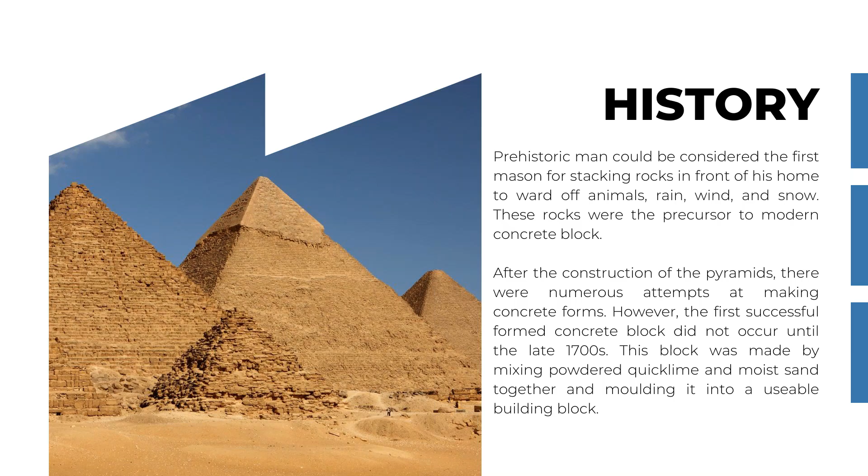In the late 19th or early 20th century, the industry started - we can say that because in 1904, Mr. Herman and Jesse Besser patented the first hand-tamp concrete block machine, which produced one block at a time. This idea caught on and the use of blocks grew.

In today's time, you can see the block industry where people have different levels of automation machines used for manufacturing concrete blocks. Over the last 100 years, the uses of concrete blocks have greatly expanded along with the technology to produce them.

If we look at the time period from the late 1700s to 1900, we can presume a lot of development took place to arrive at mechanized production. Going from manual production using available resources to converting it into mechanized production with a hand-tamp concrete block machine was a long journey - that made the beginning of the industry.

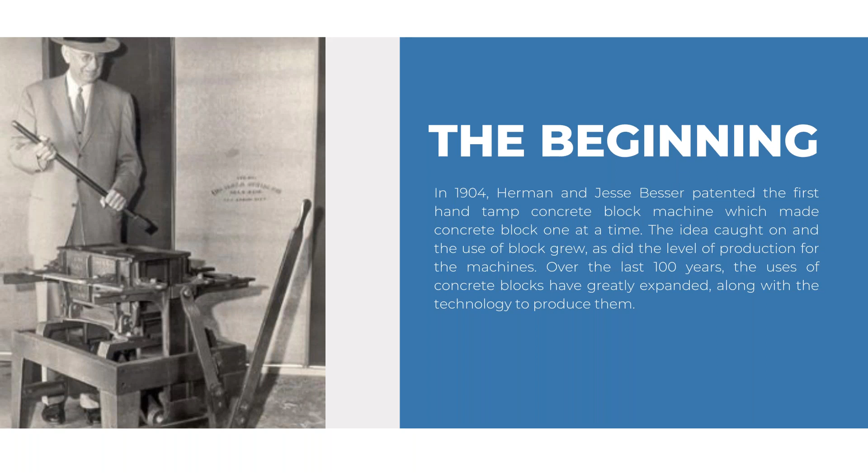With the hand-tamp machine started by Mr. Besser, the industry started. But initially, the blocks people produced were only solid blocks, because people always went for a solid component, since the block was a replacement or elevated form of brick. Brick had been available for a long time, but people wanted a better product that could be of more use to the end user. So with blocks, the first product that came into existence was the solid block.

Now we have different types of concrete blocks: solid blocks, which are widely used, hollow blocks, AAC blocks, and thermal insulated blocks. I won't throw much light on AAC blocks since we had one session on that already - thanks to Mukund Joshi sir for sharing his experience and knowledge on AAC blocks. So there are solid blocks, hollow blocks, and thermal insulated blocks.

What is a solid block? A solid block is basically a block made with standard dimensions. Today we produce standard dimensions with thicknesses of 200mm, 150mm, and 100mm, normally called 8-inch thick, 6-inch thick, and 4-inch thick. Normally the 6-inch and 8-inch thick blocks are used in external walls, and 4-inch thick ones are used in internal walls.

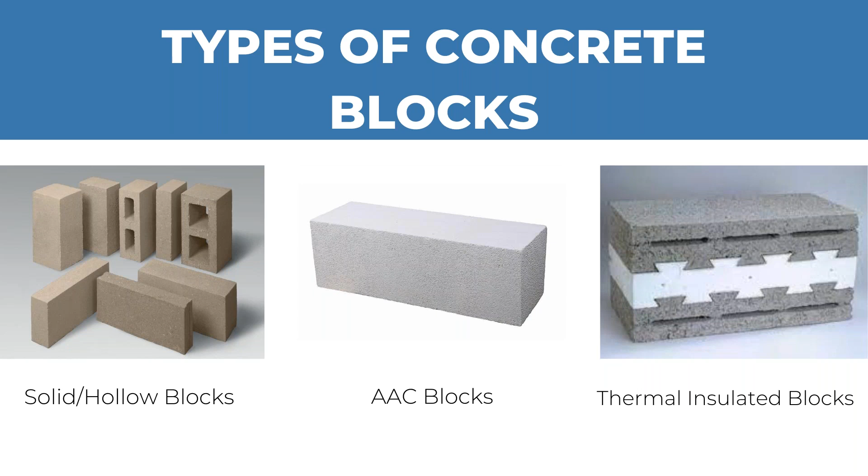As I shared with you the technical specifications of the concrete block, major manufacturers might already know the specifications and procedures to produce it. But how do we actually achieve the right quality product to ensure we are in line with Indian standards or customer requirements? I'd like to share a few things on this. Any manufacturer in this industry producing concrete blocks has to focus on 3M - material, machine, and manpower. Having the right material for the right machine along with the right manpower gives the right product.

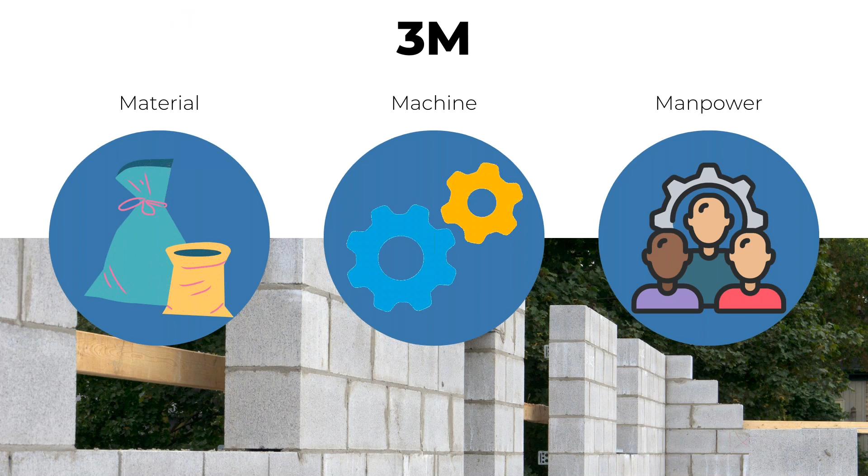Coming to the material part now, the common materials used for producing blocks are cement, SCM - which we call supplementary cementitious material - aggregates, and additives or admixtures. As most of you would have experienced, we have a range of cements. When we talk about cementitious material, we have a variety of cementitious materials. For aggregates, we have different sizes. For additives or admixtures, we have various ranges.

Now, the normal cement used for production of concrete blocks is ordinary Portland cement. Now, coming to the cementitious material.

Most manufacturers in our industry are actually not aware that with the addition of cementitious material, in the right proportion and quantity, along with the right additives and admixtures, we can produce a very good product with good cost optimization without compromising quality. To talk further on this topic, I'd like to share a few materials which, by my experience, have achieved good results.

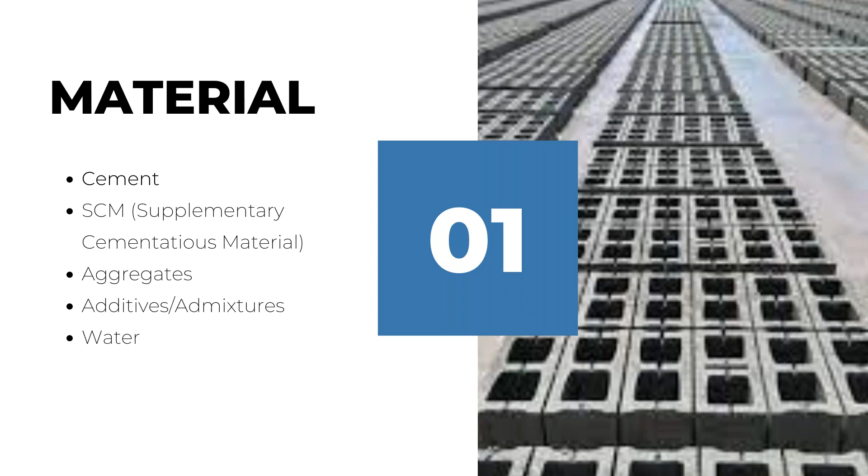Now, as discussed, supplementary cementitious materials are used for reduction of cement, normally used individually with Portland cement or blended cement, or in different combinations. What is the use of it? Reducing cement itself is a big achievement, because today it's a myth that the more the cement, the more the strength. But that's actually a myth. It's not about increasing the cement. Having the right quantity of cementitious material in the mix ensures that the concrete mixtures are economical, increase strength, and also influence other concrete properties.

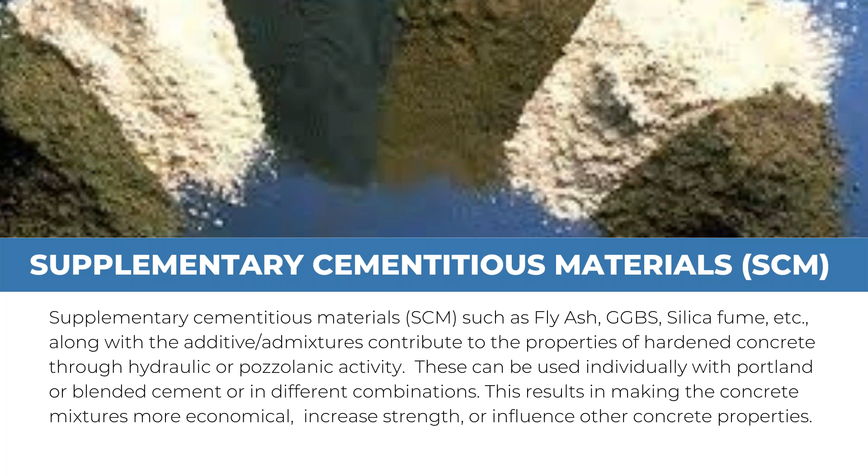Now, once we have the material set, when we know this would be the right composition to make the product, the second question arises: how do we make it? What type of machine would be the right machine to make this product a quality product?

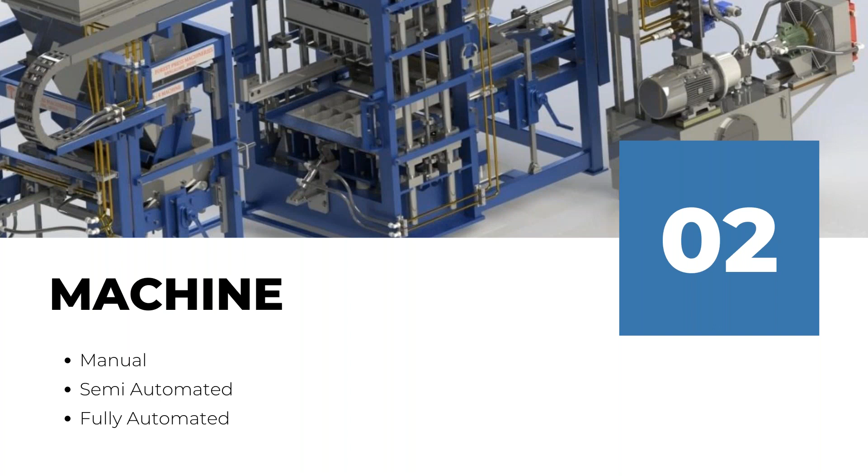Now, machines - we have a lot of machines. We have different levels of machines: manual, semi-automated, fully automated. Whether the machine is manually operated, semi-automated, or fully automated, the objective is to produce the right quality block or product. In our industry, the different levels of machines also indicate the different quality of product being produced.

The technology used for different levels or types of machines is common - basically vibro compacted technology, with hydraulic vibro compacted technology we manufacture multiple products. There are few machines in our industry where manufacturers have limited themselves only to a particular product, and the machine is customized so that only blocks are produced, and other products cannot be made. When we have machines where we can produce multiple products with the same machine, it gives an added advantage for a manufacturer.

With different levels of machines, we also have different levels of automation. Talking about the salient features of the technology with the highest level of automation - hydraulic vibro compact technology - we manufacture multiple products such as concrete blocks, concrete pavers, concrete curbstones, and bricks, in large volume. The batching is done with a fully programmed logical control technology where it is weighed, batched, mixed, and molded into products on pallets.

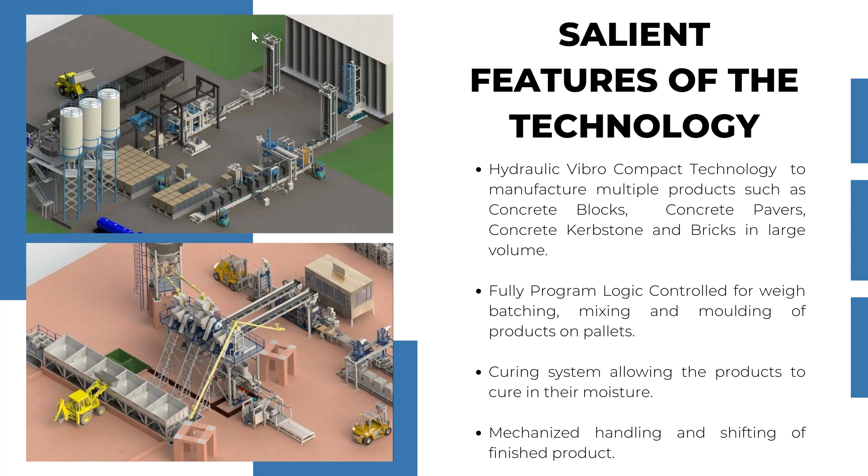Now I would be taking you to a video which will explain the working of this model.

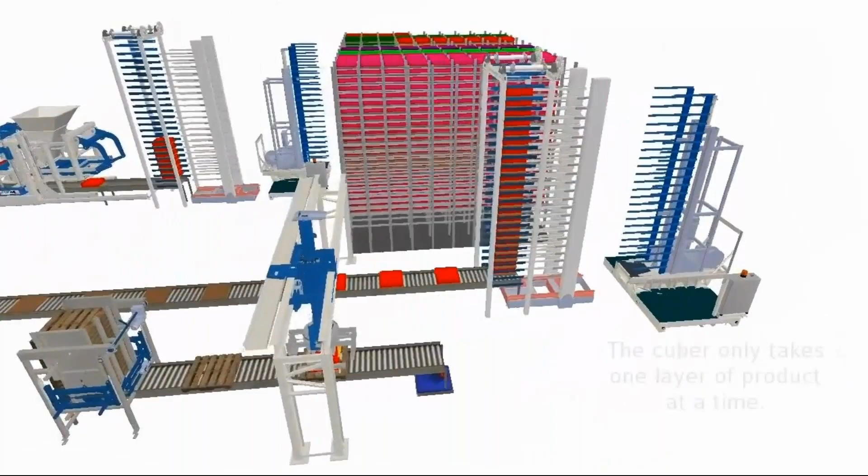So as you all saw in this video, as I said at the start of the presentation, the theory of evolution. Similarly, the technology has also evolved. Right from the hand tap concrete block machine till the fully automated setup, along with the operation and the production system, we are also evolving with the technology of curing. From the conventional practice of water curing, today we are manufacturing products with a vapor curing system, also called a hot air circulation system.

Now what is this vapor curing system? Everybody would mostly be familiar with mist curing, membrane curing, water curing. Vapor curing is a curing system where we have a rack system, a hot air circulation system, where the product is cured with moisture. Basically the vapors being produced make the product cure in the moisture.

These curing chambers are built to account for the heat transfer to the concrete products by maintaining the required humidity, and the vapor curing system accelerates the concrete hardening process. With this, higher quality concrete through the controlled addition of heat and humidity is also achieved. Let me also take you through another video which shall explain the process of how this vapor curing system actually happens.

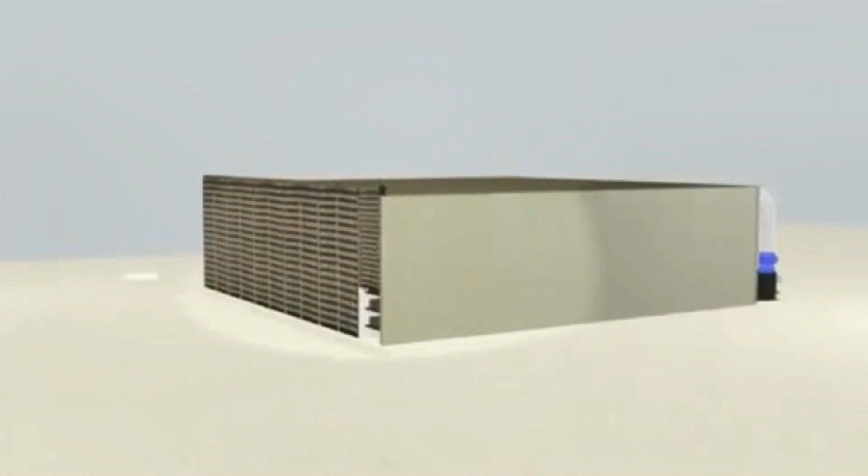This video showed the process of vapor curing, where you could see the air being blown into the chambers, and with the air circulation and the heat of hydration, vapor is generated, and with the vapor the curing starts in its moisture. With this technology, we have a lot of advantages. We are reducing the usage of a natural resource, that is water, and the curing time is reduced, so we do not have to wait for 28 days of curing to dispatch.

And let me also tell you that with this kind of technology, which most people in our industry have adopted in producing blocks, the construction also gets faster, because the earlier the supply, the faster the construction. There are a lot of advantages with this technology. When we have this kind of automated technology, we have, one, the homogeneous mix.

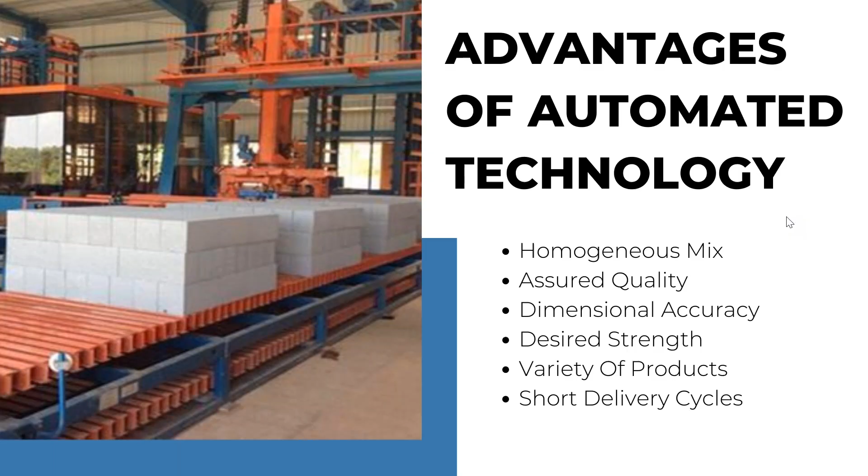Now, I just took you all through the video of the process, the curing system, but the fact is also that everybody would not be in a position to go with the top level of automation for their manufacturing unit. It depends on their requirement, what kind of a requirement they'll be looking at, or what kind of a project they'll be delivering. So case to case, it varies.

So today in this topic of the inside story of the concrete block industry, I would like to highlight a few factors that influence the selection of machines. Rather than looking at the level of automation, we should initially be looking at the production capacity. Whenever we are investing in machines for producing concrete blocks, pavers or curb stones, what type of production capacity are we looking at?

And the kind of mobility: are we looking at a stationary machine, or are we looking for a mobile unit? In most cases in our construction industry, we require machines that are mobile, that can be shifted from one site to another based on the client's requirement. In such cases, a high level of automation can also be done, but with certain limitations. And with stationary machinery, we always have high levels of automation, and also mid-level automation, giving better productivity.

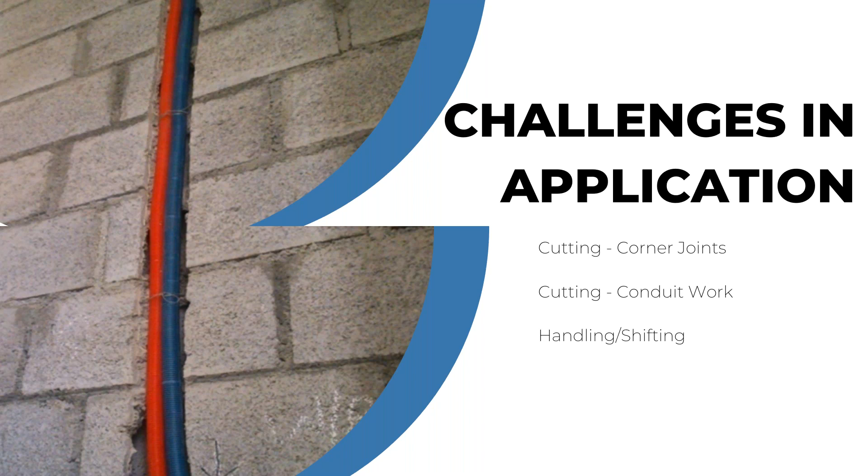And in the production of concrete blocks, when we use recycled contents, such as supplementary cementitious materials like GGBS, fly ash, silica fume, it helps in reducing the carbon footprint, which also gives us an added advantage in terms of green building. And since these products are precured products, it saves water during construction.

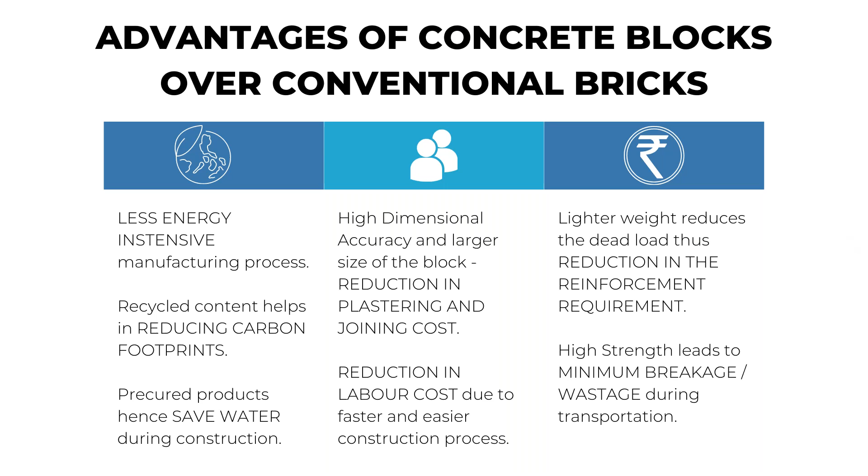Now, going to the future, what we see today is the construction industry is booming. We see a lot of construction activities happening. We see the construction is growing. So as the construction industry is growing, the concrete block industry is also growing. It is expecting business to be stronger.

And as the block industry expands and becomes more sophisticated, the block plants are also being forced to change to keep up the expectation. So the equipment manufacturers are also changing to meet the needs of the industry. And as it has for the past 1,000 years, the block industry will continue to grow and change.

Now, it evolved out of necessity for protecting human life. As I said in the initial slide of my presentation, the blocks started as a protection for human life. Now it evolved with that necessity for protecting human life. Today, many centuries later, concrete block is still protecting people's lives by providing safety, comfort, and shelter.

So with this slide, I would like to conclude saying that the concrete industry's evolution started just as a barrier for a human's requirement for safety, and today with the technology, with the materials, and with the manpower, the industry has grown up to an elevated height, and we expect it to grow higher